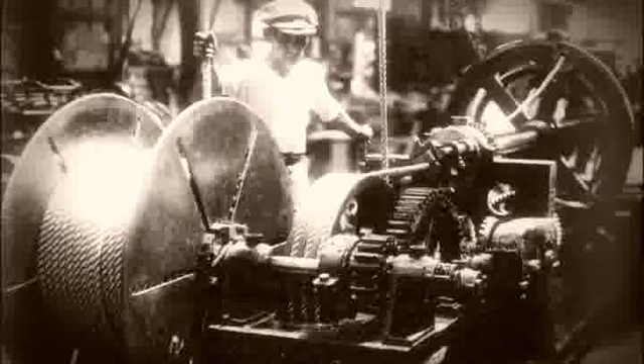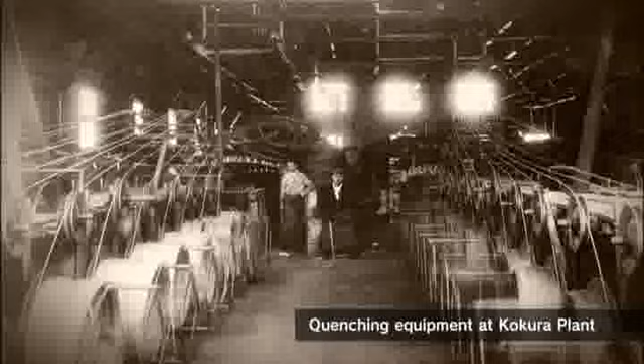Following the production of Manila hemp rope, they succeeded 10 years later in producing Japan's first wire rope. Since then, Tokyo rope manufacturing has remained a top manufacturer of ropes in Japan, with a history of over 100 years. Ropes and their related products support a wide variety of industries in Japan, literally from the outside and inside.

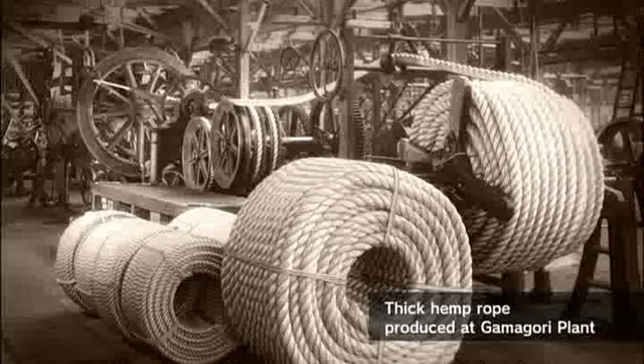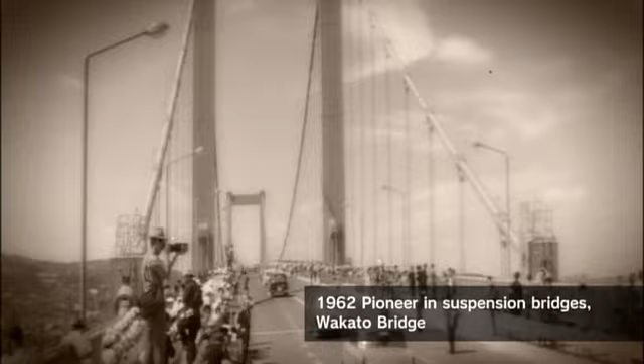The trust of our customers is the biggest asset of Tokyo rope manufacturing. The company has undergone technological innovation in unrelenting pursuit of improved quality and development of new products to create a comfortable, secure world.

Tokyo rope manufacturing is now making use of the power of technology to expand the fields of business through expansion of our global offices. This is based on our concept of total cable technology.

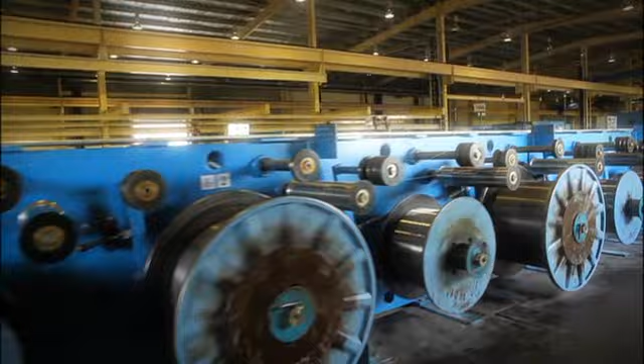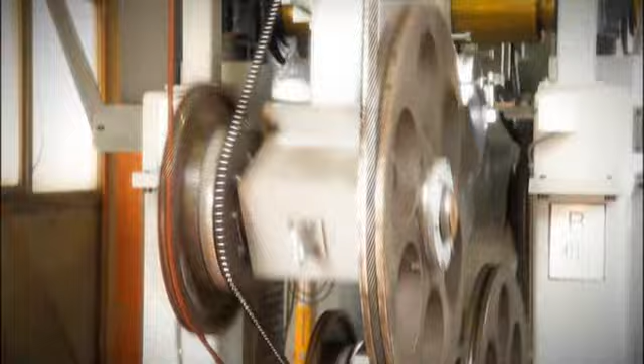Making use of the advanced technology accumulated over the years, we explore the potential of a variety of materials according to the diversifying and increasingly sophisticated needs of customers to further innovate manufacturing technology. We also carry out maintenance on products currently in use, for example, through assessment of life expectancy.

The company will take on the challenge of moving up to the next stage in its growth based on overall strength.

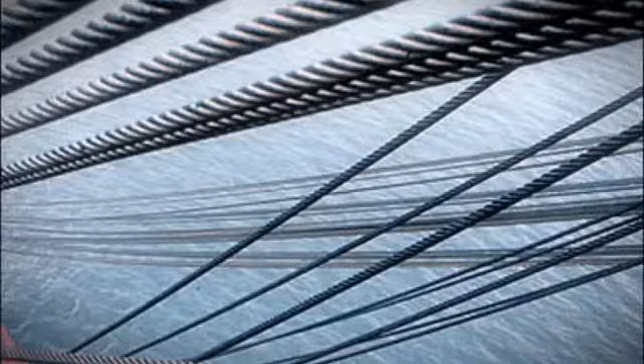The business fields of Tokyo rope manufacturing are divided into 4 sections for developing and providing products. Wire ropes is one of the products to represent our company. It usually does not attract much attention in life. However, if you look around, you will soon realize that wire ropes is a very important backseat player to support our daily life.

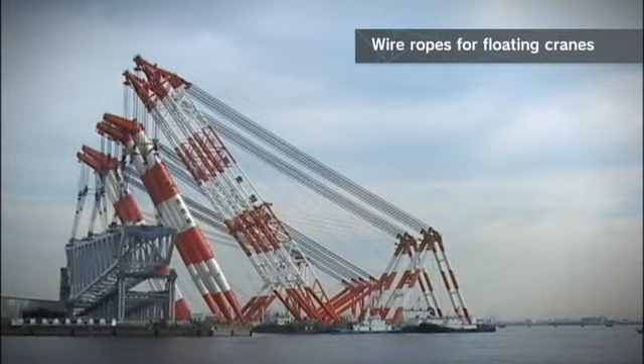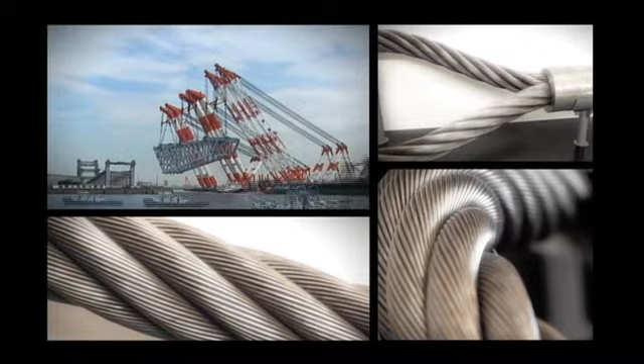Cranes have been varied in their functions and constructions. We design and manufacture wire ropes to meet such diverse conditions. For instance, we can say our ropes for floating cranes is one of the strongest ropes we produce, and it is capable of hauling up to 4,000 tons. Also, it is used for cranes to build skyscrapers.

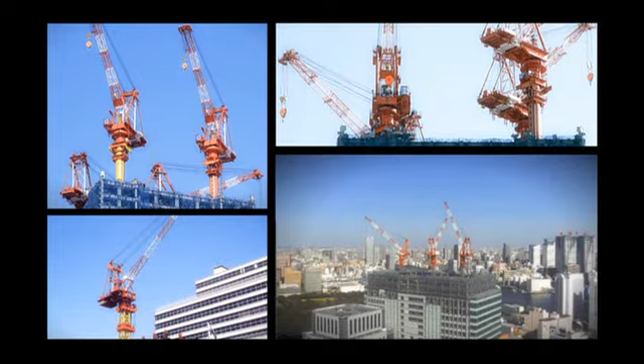Tokyo Rope brand elevator wire ropes are used on a worldwide level. Tokyo Skytree, Yokohama Landmark Tower, and the Shanghai World Financial Center are just some examples of the buildings to have elevators with our ropes. Our elevator wire ropes are used for high-rise buildings all over the world. In 2006, a plant specializing in making wire ropes for elevators was established in Vietnam to realize a supply system allowing prompt response to global demands.

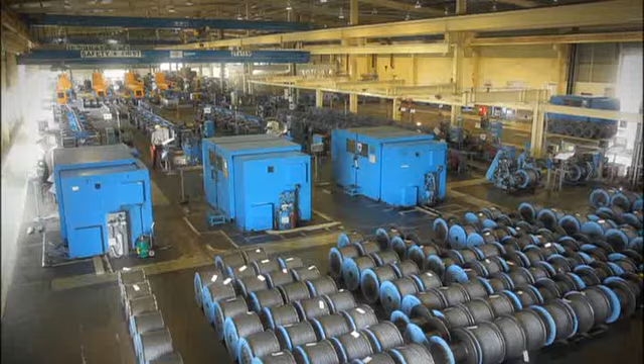Tokyo Rope enjoys a reputation of being the major manufacturer of wire ropes for cableways.

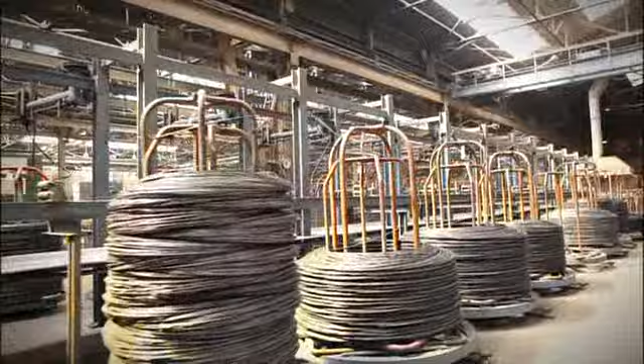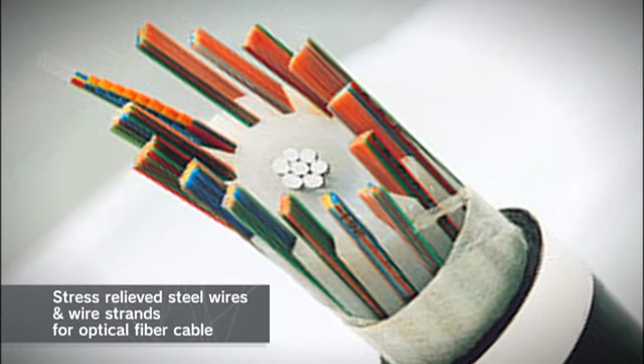Steel wires, including wire ropes, make up the foundations of the company's main products. They are used extensively in everything from key industries such as power and telecommunications to general household products. Zinc-coated steel wires in particular, which need to perform under rigorous conditions, or steel wires used for reinforcing optical submarine cables, which need high corrosion resistance, require unique technology.

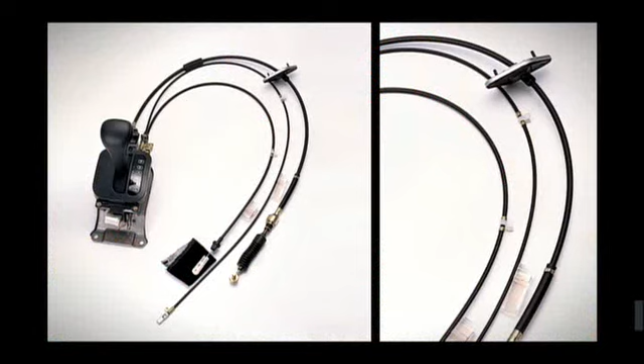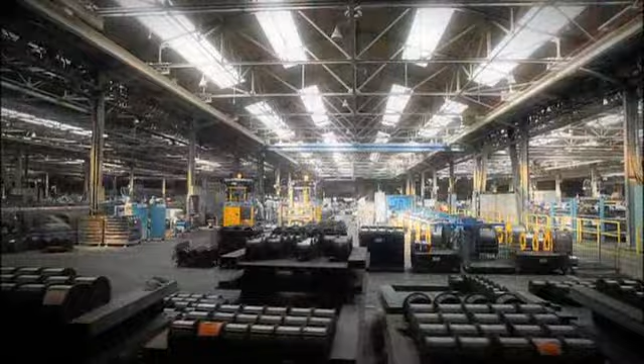Wire ropes are also used extensively in fields such as automobile control cables, civil engineering, and flood prevention works. They prop up social infrastructure and people's lives. The Tsuchiura plant in Ibaraki Prefecture, founded in 1970, is Tokyo Rope Manufacturing's main wire and wire rope plant. Integrated production is carried out here, from manufacturing and processing steel wires to ropes used for a variety of purposes.

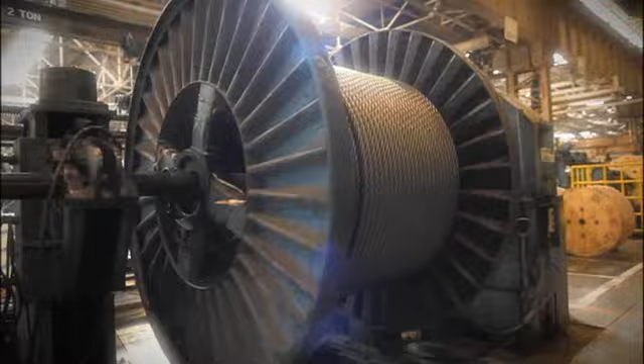Furthermore, the Sakai plant looks out over Osaka Bay, and production supply is carried out, taking advantage of its location in transportation.

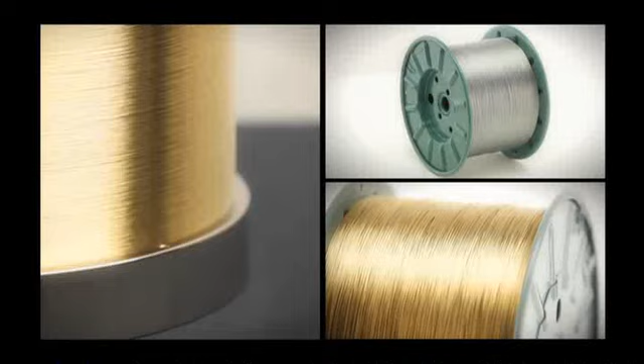Steel cords use wire thinner than hair. It is the limit of metal processing.

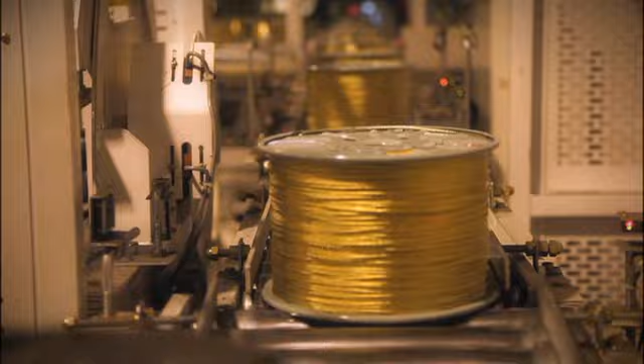Thorough automation has been implemented at the Kitakami plant in Iwate Prefecture, boasting to the world a production system in which everything from the replacement of bobbins to conveyance, stocking, and packing are controlled entirely by computers.

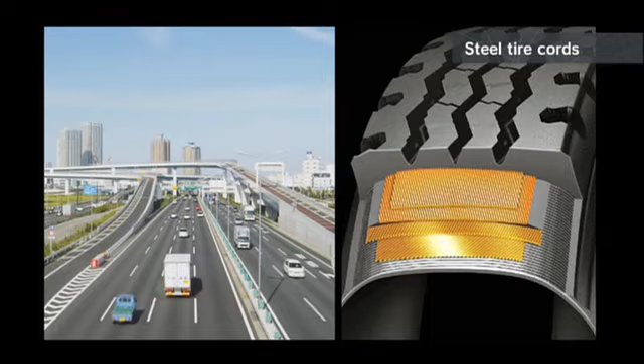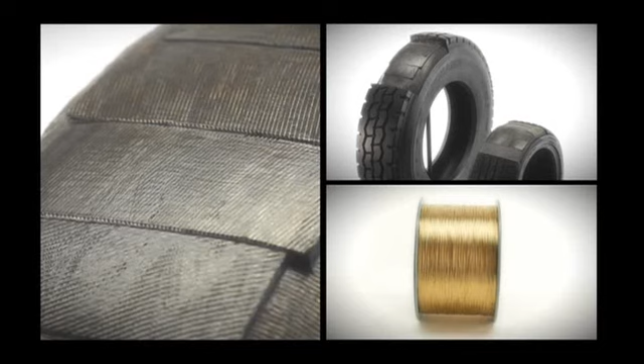The main products are steel tire cords used for reinforcing automobile tires. Our steel tire cords are high-strength, extra-fine wire, most suitable for wire drawing, and stranded wires made of high purity and high cleanliness wire rods. We have won high appraisal from both domestic and overseas tire manufacturers.

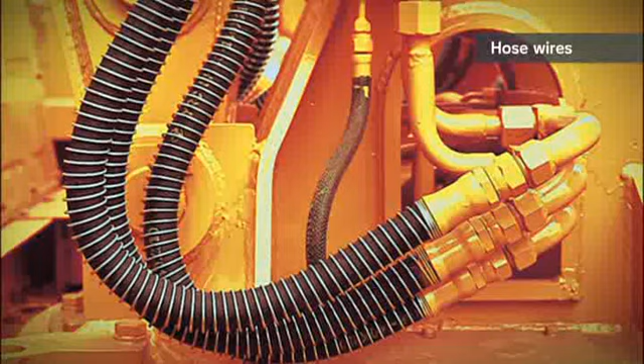Hose wires are also high strength, used for reinforcing high-pressure hoses.

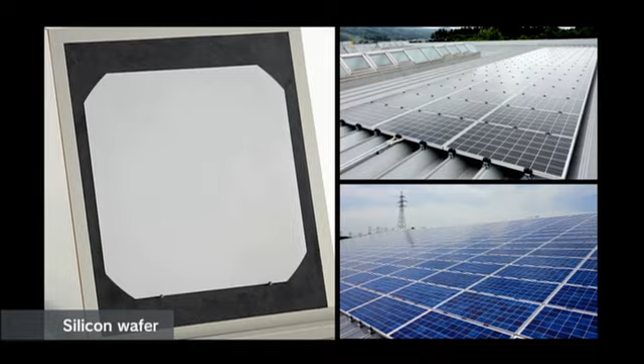The extra-thin saw wire is a product that requires strength and stability, and it is used for slicing silicon ingots used for semiconductors and solar cells. Wire saws, which are cutting devices that use these saw wires, are manufactured at Kitakami Machinery Works.

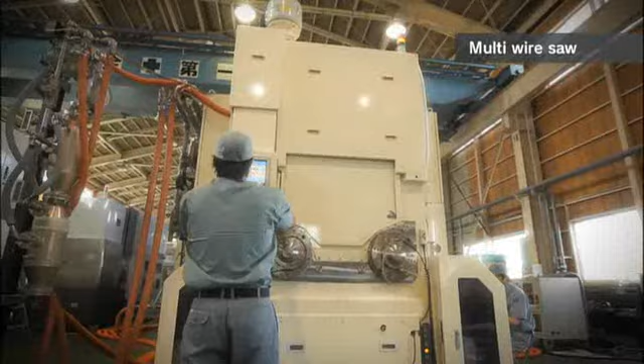Tokyo Rope Manufacturing is the only company in the world that can supply both saw wires and wire saws, and we have won high international appraisal in this field.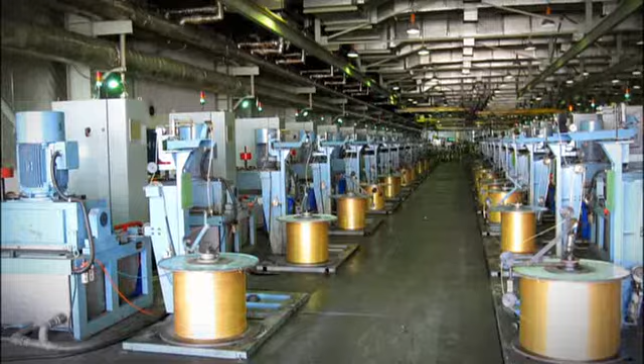Tokyo Rope Changzhou Company Limited was established in Changzhou, China in 2005 in response to the globalization of automobile production centers. Furthermore, Tokyo Rope Malaysia Sendirian Berhad was established in 2010 in response to increasing demand in ASEAN countries. Kitakami is the mother plant, with the steel cords and saw wires of Malaysia and Changzhou forming a tripolar production system.

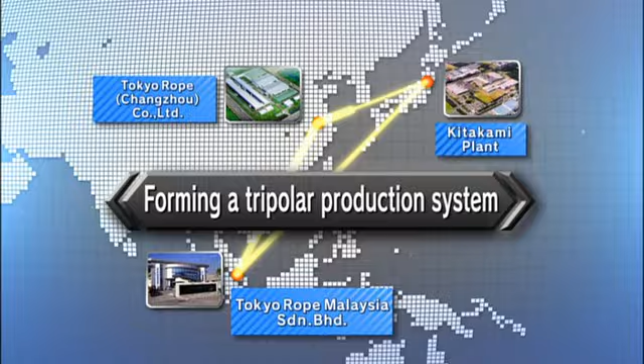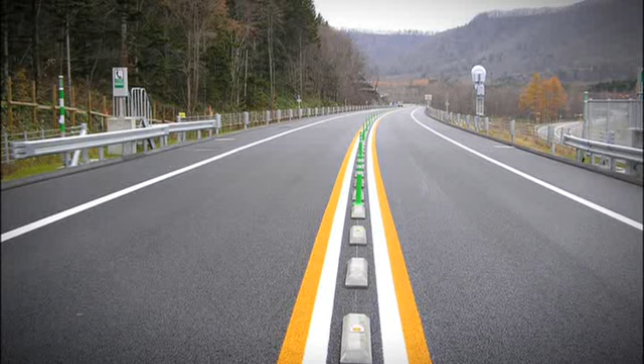In the engineering business, we are involved in the construction and maintenance of the expressway network, which began in the mid-1960s with progress in motorization. We also develop products and construction methods and carry out construction necessary for building and maintaining roads in Japan, where 3/4 of the country is covered in mountains.

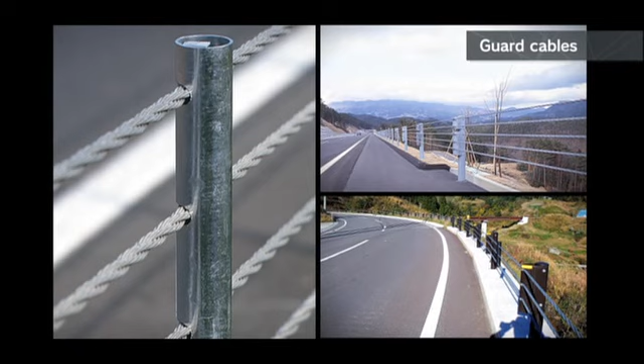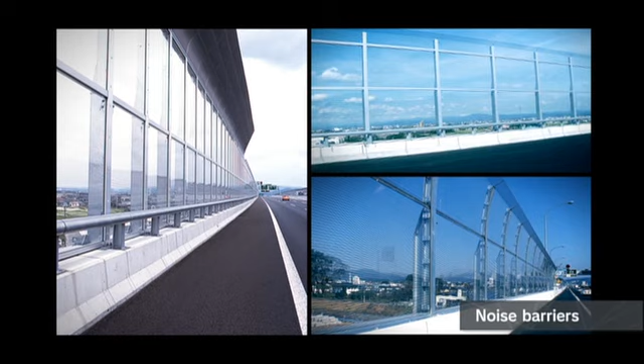As for road safety-related products, we not only ensure the safety of roads with guard cable and rock fence, but we also provide environmentally friendly products that are highly functional and durable. In addition, we develop and provide soundproof walls that cut noise while maintaining a pleasant and open appearance, or a variety of snow fences that protect roads from snow blown up from the ground and snowdrifts.

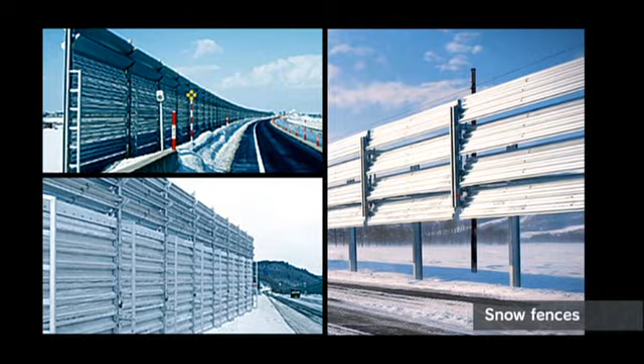Other products we provide include not only fences for protecting against falling rocks, flexible mighty fences, and suspension cable screens, but also curtain net, rope net, and mighty nets, among other nets for protecting against falling rocks and ensuring the safety of roads.

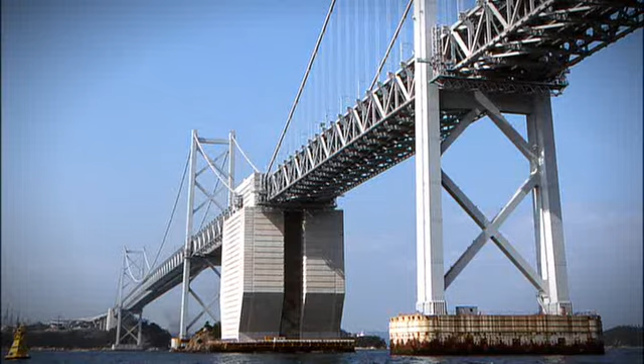The cable products of Tokyo Rope Manufacturing, praised for its highest quality in the world, have been used in many of Japan's landmarks. It is not an exaggeration to claim that the cables of Tokyo Rope Manufacturing are holding up all of the major suspension bridges of Japan, from the longest bridge in the world, the Akashi Kaikyo Bridge, to the Great Seto Bridge and Rainbow Bridge.

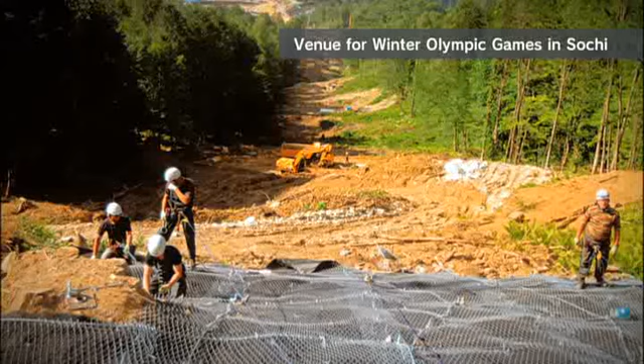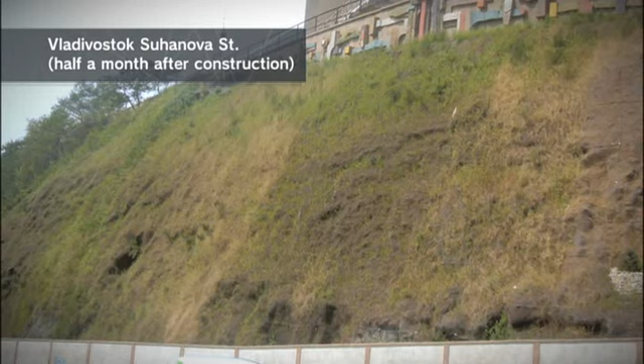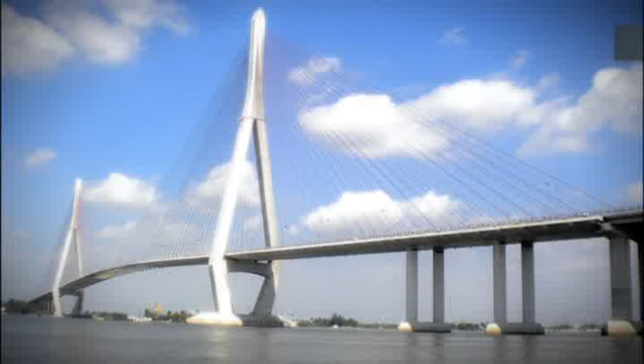Our engineering business is now expanding its activities out into the world. The mighty net is being used in CIS countries, including Russia, to ensure the safety of roads. Tokyo Rope Manufacturing cables are also used in the Stonecutters Bridge in Hong Kong, one of the biggest cable-stayed bridges of the world, and the Can Tho Bridge in Vietnam.

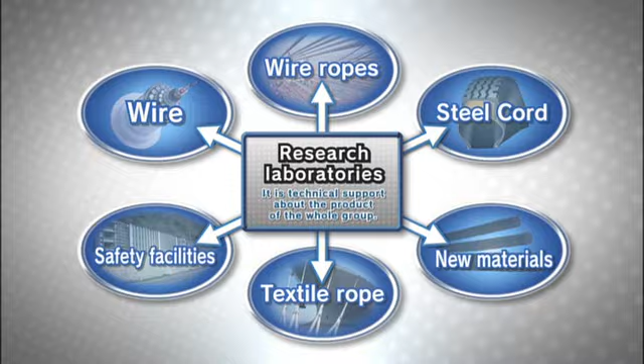Technical development is the foundation of Tokyo Rope Manufacturing. The research laboratories at the center of technical development are currently located within the Tsuchiura plant. It operates in collaboration with all businesses of the Tokyo Rope Manufacturing Group to engage in research activities ranging from development to investigations and testing and evaluation.

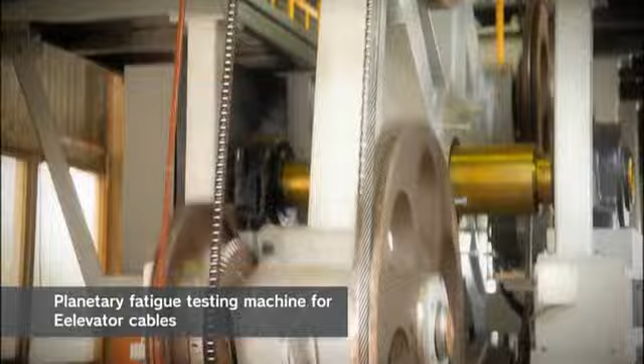In particular, we not only have a wire rope manufacturer with an electron probe microanalyzer and an inductively coupled plasma atomic emission spectrometry, but we also have a planetary fatigue testing machine for elevator cable and a wire rope fatigue testing machine, making it one of the biggest state-of-the-art research facilities in the world.

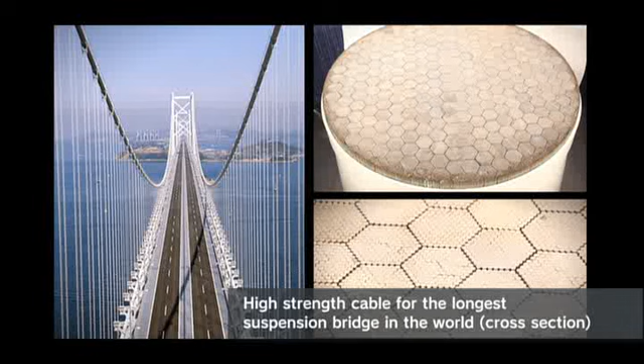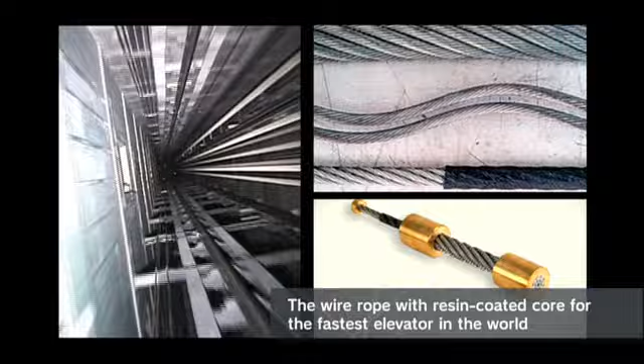We constantly strive to stay one step ahead of the times through a variety of technological innovation to create a high-strength cable for the longest suspension bridge in the world, the wire rope with resin-coated core for the fastest elevator in the world, and wire rope testers. We plan to continue developing highly functional and high added value products to bolster our foundations.

As competition intensifies in the global market, customer needs are diversifying and increasing in sophistication, including not only demand for greater strength, but also lighter weight, longer life, advances in diagnostic technology, and cost reductions.

At Tokyo Rope Manufacturing, we are striving to expand our offices in response to globalization, while simultaneously making use of our unique strengths, combining the huge potential of unprecedented materials with our technological depth to continue our challenge of becoming a company that provides total cable technology.

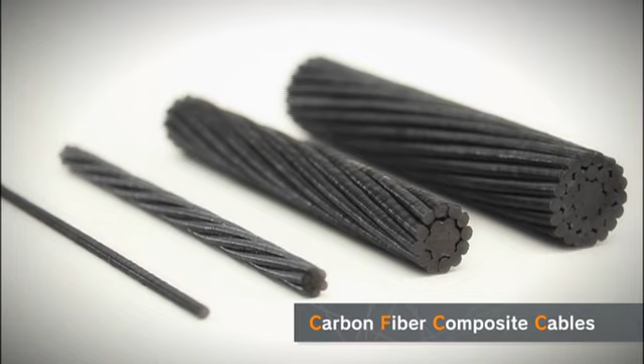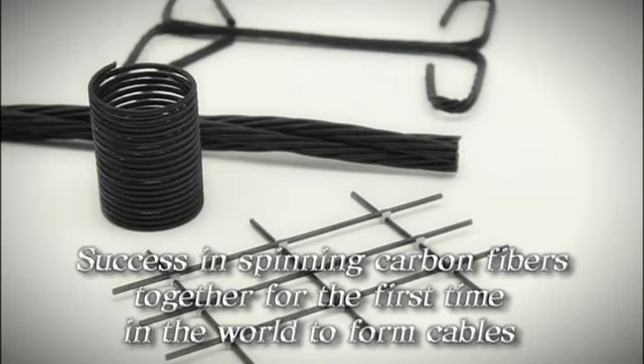Carbon fiber composite cables, CFCC, are currently attracting the most attention. Tokyo Rope Manufacturing made skillful use of unique technology to successfully spin carbon fibers together for the first time in the world to form cables. CFCC is used for a variety of purposes that take advantage of its properties of being low elongation, lightweight, and rust-proof.

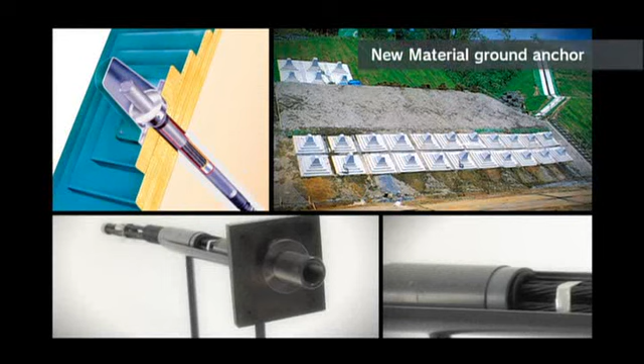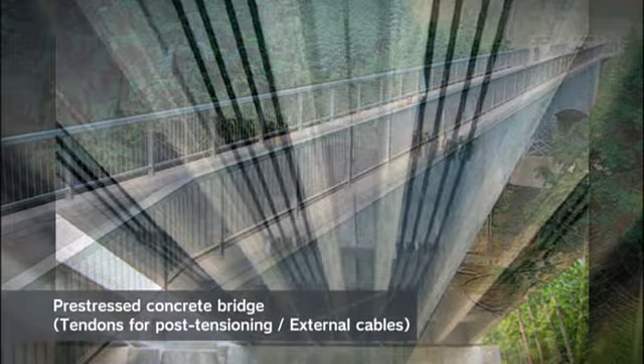CFCC has traditionally been used domestically as anchors to prevent landslides in corrosive environments, such as in hot springs or seaside areas. It is also extremely effective as structural reinforcement material for use in concrete for bridges. It will extend the life expectancy of bridges and massively cut maintenance costs, for which it has attracted a lot of attention from all over the world, particularly from North America.

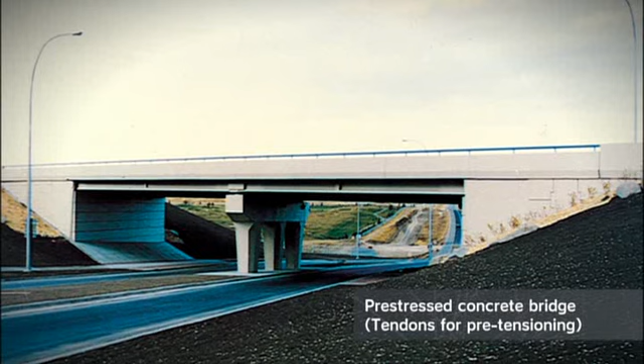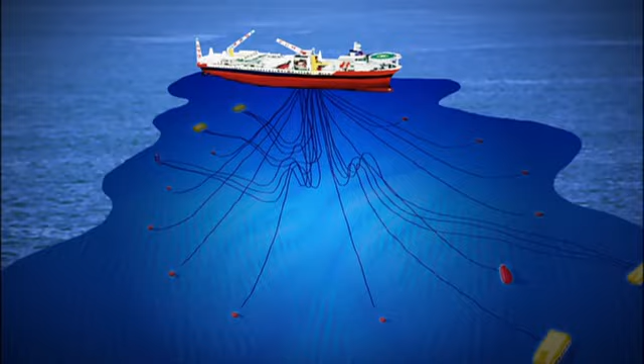We are also making advances in the development and manufacturing of ropes using new fibers. As offshore energy development and projects to develop gas fields spread rapidly, the development and manufacturing of products using a wide variety of materials, such as heavy gauge wire ropes, superfiber ropes, and CFCC, for maintaining plants that draw energy from the bottom of the ocean, are advancing at a rapid rate.

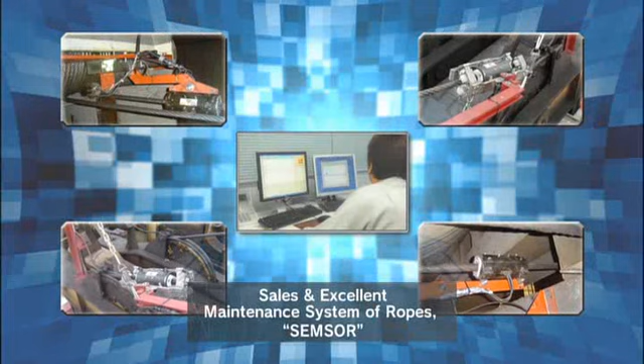Sales and excellent maintenance system of ropes, SEMSOR, allows the systematic replacement of ropes without obstructing operations by connecting ropes used by customers to our company computer system using the internet to carry out constant monitoring.